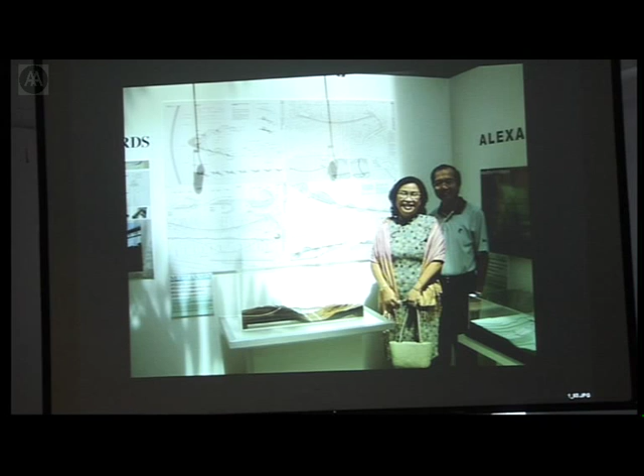So it's a big planning project for Singapore. In other words, it's not really about just doing buildings and infrastructure. It's about planning this very long area. So there is basically one site, which is ours, which is here. Another one, which is Alexandra Link, another bridge. Competition was set at the same time, plus a number of other small projects that make up that very, very big kind of region.

So this is a close-up of these models, which are very nice. The Ministry of Equipment has them in Singapore. They're all over the place at different scales. This is our site. That's our bridge, kind of. And to put the scale into perspective there, the bridge is actually 250 meters long. So these are fairly vast areas that we're looking at on the model.

And I think the criteria initially given was the distance between the two peaks, which we were trying to connect, the 250 meters, and the allowance of support piers at around a 25 meter to 50 meter spacing. Other than that, there was very little control or constraints over where this bridge could be formed, other than the model that you see there.

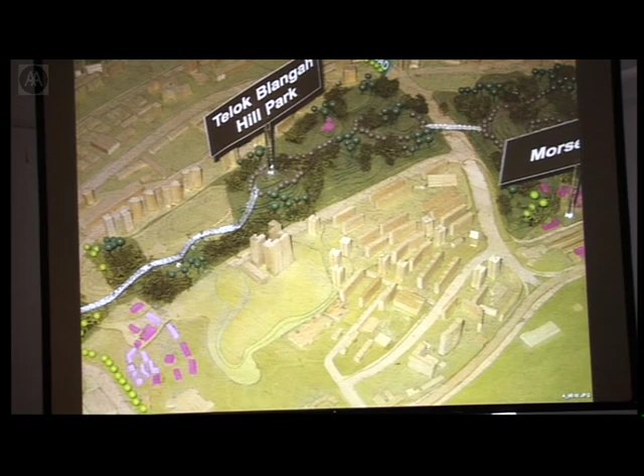Yeah, it's exactly that, if you like. The competitors were offered two sites. In other words, you were invited either to do this one or basically that one. And as Paul said, you see the one we chose, Henderson Crossing, is actually a sort of great leap forward, almost 300 meters between point A and B, over a freeway with 6 lanes, as opposed to this one, which I believe a number of people did even at the AA.

It's a very nice site, which is effectively a long crawl towards that avenue here, which is called Alexandra Link, followed by a very small leap, a tiny bridge, if you like, over the freeway itself. So this was more of a landscape project than an infrastructural one, or kind of a nice integration of both. I mean, if the office had been bigger, we would have done both, but it was difficult.

I think someone from the office, your office, did the other one. Was it Raymond, I believe? They didn't win. Okay, no. So you can see the Alexandra Link here and the Henderson Crossing.

That's part of the brochure that we're given. This is the jury, by the way. This is Mrs. Coe, the Director of Planning.

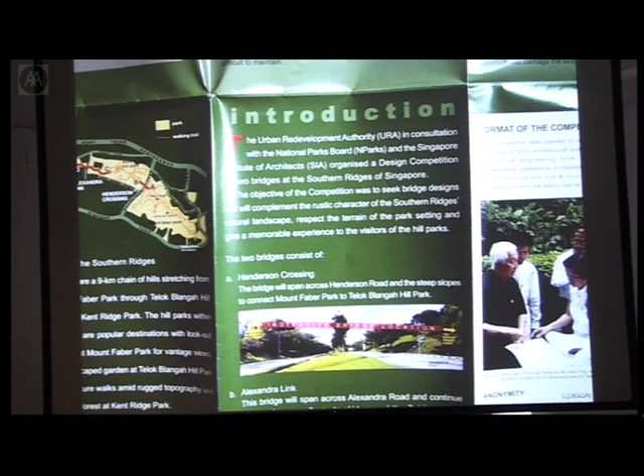And you see that's what the site looks like. I think Paul and I took that picture that morning we arrived. It's a strange mix of secondary rainforest and public housing. So depending on where you actually look, you are either in the jungle or in the middle of a concrete town, and it's a quite nice mix, which, for those of you who are familiar with Singapore, is quite common.

Now, this is the site, and as you can see, that picture wouldn't have been possible without the bridge proper, which you see a little bit in the foreground. That's the freeway. It's a really beautiful, very, very dynamic kind of thoroughfare, sort of crossing through that chain of hills. This is where the picture was taken earlier, where Paul and I were sitting. So that picture is taken from the bridge as well.

I promised I wouldn't talk about process, but it's a little bit about that as well. The project began initially as an algorithm, a piece of text, an early text that I wrote in IJP, which came out in 2003. That was the first phase of the project.

There is one text here where the actual equation we used is described purely verbally. Somewhere between the conceptual definition and what happens much later, this is a slide of the contractor, and somebody working with the contractor who's actually produced stencils of indices to mark every single metal load-bearing element that's part of the surface form. You'd think I would have asked for that, but they actually did it themselves.

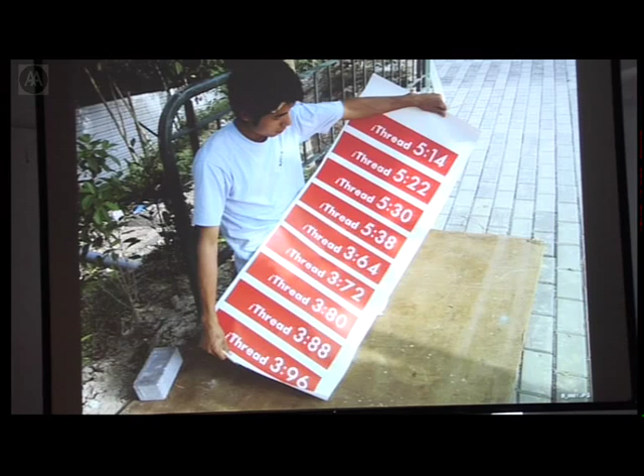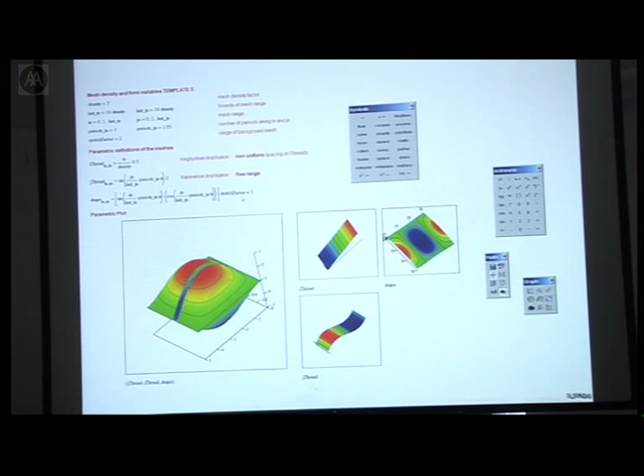That's the text in question, in which I discussed the pillow as a kind of mathematical construct. This is the seed, the egg, if you like, from which the bridge hatched. You can't quite see it right now because this is the undeformed, undifferentiated structure, but it's really the type of equation which, further manipulated, has that elementary figure we were looking for, an alternation of peaks and troughs, which Paul very early defined as a succession of arches and catenaries. I'm saying this because that kind of information is what we shared at the very beginning.

I think it's worth saying that when we had the basic parameters of the site, we sat down and started to look at what form the bridge could take without getting into the mathematics. We began to look at what an arch should do if it was going to work efficiently, what kind of span, what kind of rise it should have, and what we could work with in terms of the terrain as well, and where the support should be.

So we tried to set some basic parameters very early on in the design process, which could then be fed into this mathematics here. And it would begin to inform the design from the constraints that we were working from the site as well.

We also had an idea of the kind of materials we were looking at, how those materials were going to be formed, how the curvatures could be formed, and all of this information is incredibly important to bring up front and early on in the design process, knowledge about the manufacturing and the erection of the bridge itself. All of that helps to drive out a very real solution at these early stages.

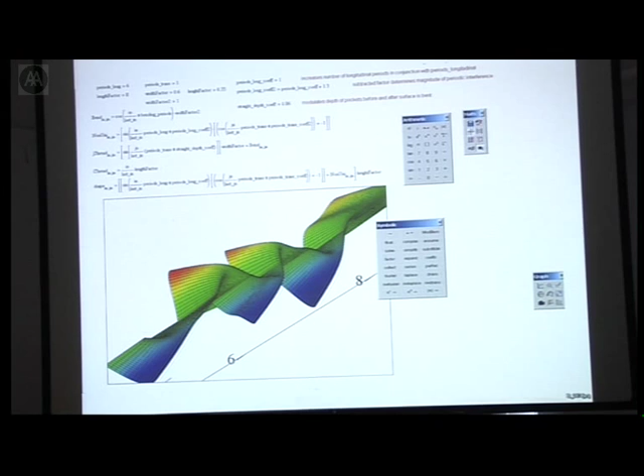Basically something that could be very easily produced. I usually use this slide to say that using this particular method, which is IJP's trademark, you can do anything you want, including something that looks as cool as something you could do in Rhino or Maya by more traditional means, but which in this case wouldn't make the structural cut.

So this is what Paul and I, in the end, settled for. It's this succession of upside and downside pods, or spans as we call them, which Paul defined quite clearly as being able to work with longitudinal members, which would be alternatingly arches and then catenaries, on the flip side. I think the important thing at this stage was, as we were developing it, we could begin to import it into analysis software and test it from a very basic point of view.

But at least, again, we could begin to inform the design not only with the parameters we originally set up, but now we could start to feed in the analysis we were doing on the bridge, and we could then tweak any of these conditions that we originally set.

Because George was working very much in a digital environment and had complete control over all the coordinates he was using, it made this transition or discussion between the structure and the architecture very easy. Things crossed the platforms very simply in terms of drawing, analysis, and between all the different pieces of software we're using. That's very important at the early stages, to get real feedback in real time.

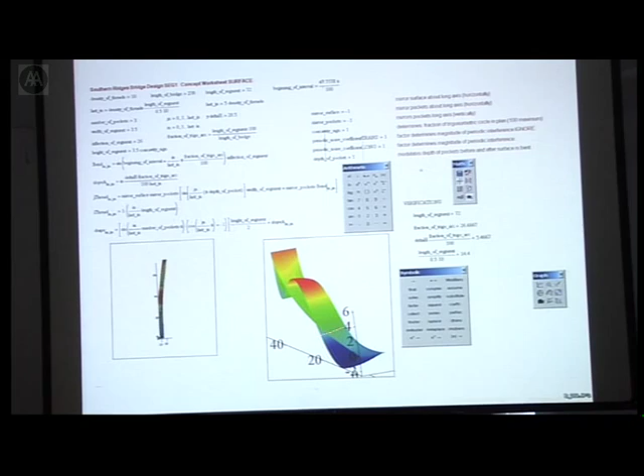In the spirit of showing what the process really does in reality, that's what the succession of arches and catenaries became. Mathematics has really informed the whole process in a give and take way, as Paul just explained. This is the seating, that's the math of the seating if you like, which doesn't quite look like it, but in reality it's basically these areas and so forth. It's the same kind of relationship between the algorithm and the making.

Another thing I wanted to say is that over the years I've been releasing detailed pictures of the bridge, and Paul and I have been saying everywhere that it's 300 meters long, but it's probably been misperceived as being smaller than it is.

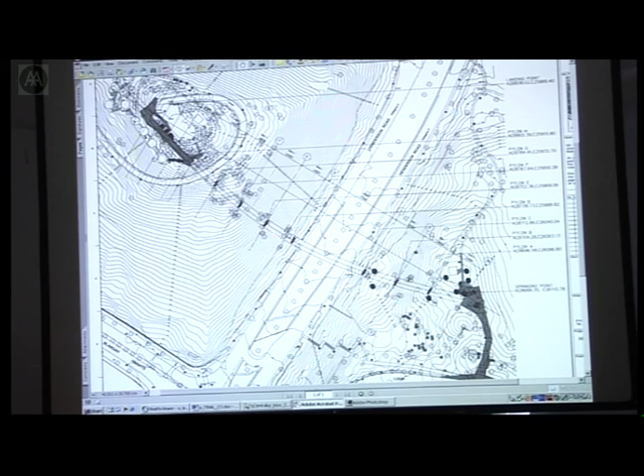I just wanted to show you, this is the springing point. These are the pillars that Paul mentioned, which are spaced by either 24 or 60 meters. And it's a big structure. If you look at how it spans the landscape, in reality you can't even photograph it entirely. This would be one shot of one of the 24-meter spans. So either through the distortion of the lens or the landscape, it's not a structure you can capture in one stroke.

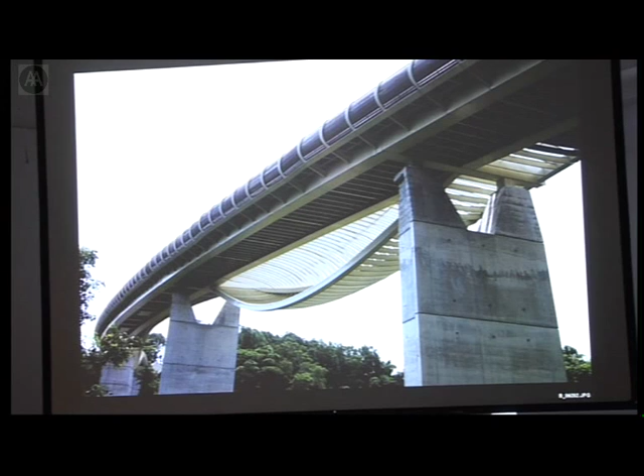Yeah, very much so. If we're working with complex or irregular forms coming from other pieces of software, some of the big problems we have are trying to clean those models up. Geometrically, they can often carry a lot of problems within them. When we bring them into a different analysis software, it will actually fall apart because it can't understand the same geometry as where it's come from. So this kind of cleanliness, this way of working, was again very important to get into answers quickly and get real feedback into the design.

And from this we could extract, as George says, center lines to all the members we had. We could begin to check geometry, start to think about fabrication, and think about how the bridge could be spliced, brought to site, and erected in place. So all of these thought patterns can begin when you've got an intelligent grip on the geometry you're dealing with.

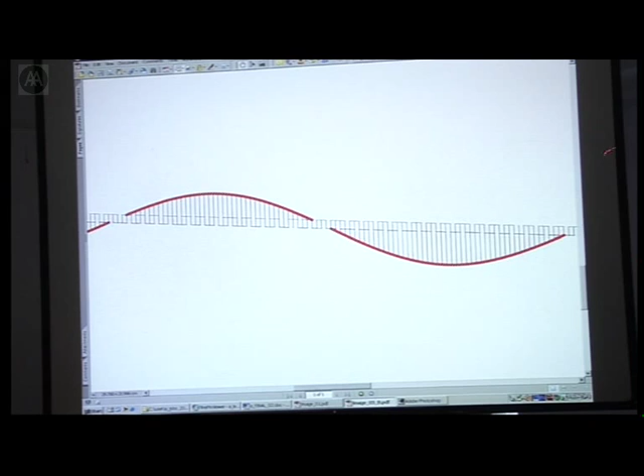So in order to leap over that gap of 300 meters, the bridge has to bend in plan so that it's a little bit longer. It also has to climb, and it climbs by about 18 meters, which would be almost a 6-7 story block. And then, because it's periodic, it has to undulate. The combination of those three movements produces an elevation like this one.

I show this slide quite often to draw attention to the fact that it looks like, say, a bird's eye view, but it's actually a facade, because the three motions built into that parametric modulation make the form slide in and out of alignment. For instance, each one of those members here, all those lines are shown in true shape, like you could measure them with a ruler, while at the same time they move wildly in depth. That kind of effect is quite familiar.

What it means on site, familiar to those who use parametric equations, is that you can easily mistake a plan for a section and vice versa. In reality, you see all these points vary. That detail was developed to pick up those slight differentials that have to do with that sliding in and out of space. But all these members are absolutely parallel and can be flat sheet cut and assembled. That was an early benefit of that particular kind of modulation on the definition of the structure.

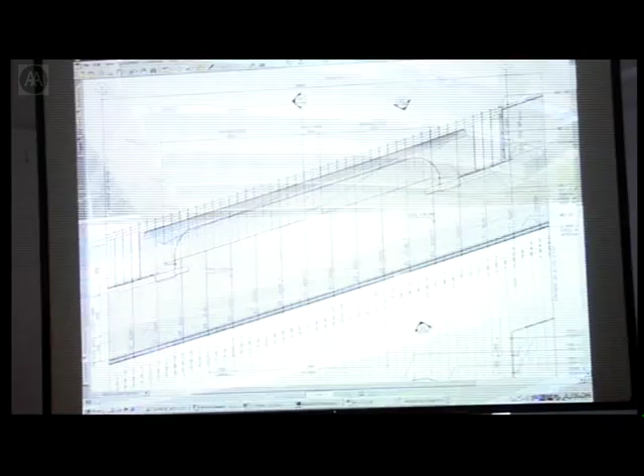Another problem of this sort is what I call the Stephen Hall effect, because that facade that looks like a bird's eye view is pretty much what they used to call a cabinet cavalier projection, where you draw the elevation and draw the volume receding in depth, except here it's spatial as opposed to being just graphical. That effect has all sorts of problems.

For instance, I show this plan taken out of the tender package, on which maybe 80% of the lines shown here cannot be measured because of these distortions. So we even added a disclaimer on the tender package, somehow making sure that you wouldn't attempt to derive any dimensions of this particular element. In reality, what does this mean?

Well, this is a close-up of the diagram that we just looked at. In reality, it's more like this. In other words, it's a kind of completely discontinuous element.

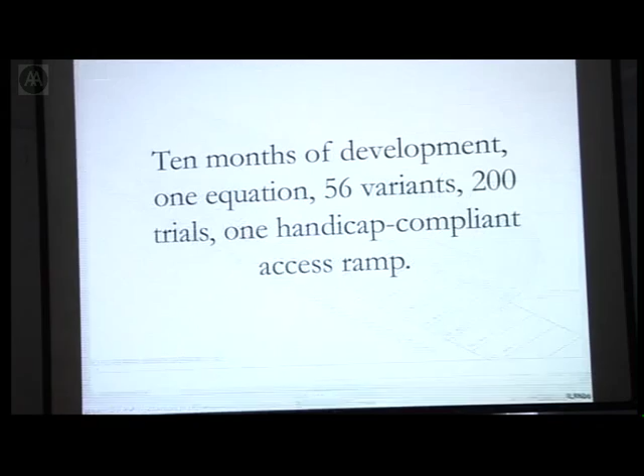So this is a close-up of the deck where you have seating, a backrest, and a series of flights and horizontal thresholds, all of which create a very discontinuous condition where, for instance, a landing, a tiny landing of 4 meters by 1.5 meters, needs its own equation in the scheme of things in order to be jogging properly with the remainder of the form.

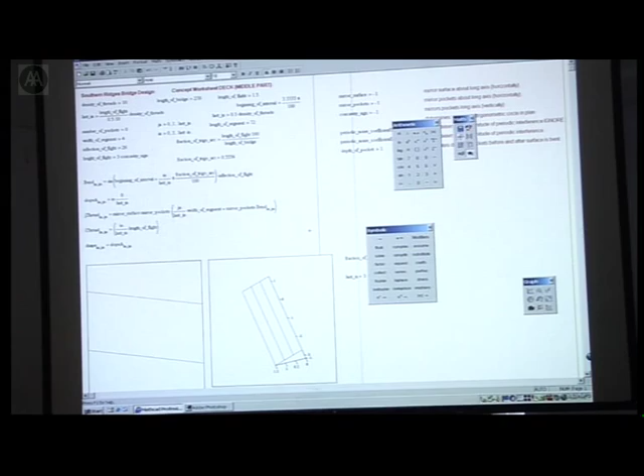In reality, it will produce these elements. And you see all these discontinuities, which give this rather unsettling aspect to the deck, which we'll see in a second, somehow begin in this breakdown, which forces you to reconsider what happens every 9 meters, 1.5 meters in space, with all the kind of periodic modulation.

So this is our control panel, which we used, if you like, to verify the accuracy of the calculations, to make sure that you don't split the deck open and that you can actually clear all the heights in order to land safely a wheelchair across the bridge over 300 meters.

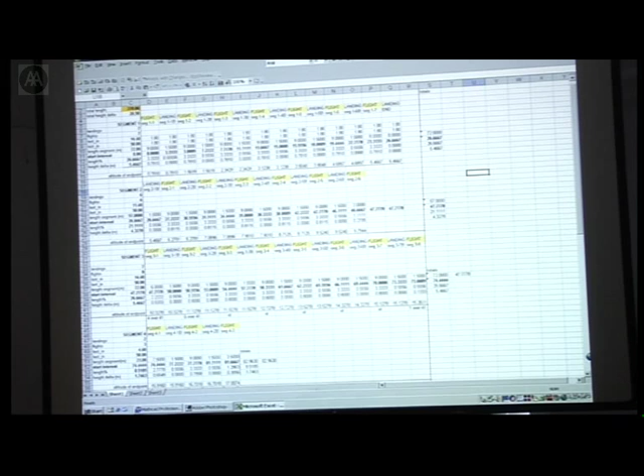For those of you who remember, we exhibited these calculations a little bit like decoration. Was that in 2006 as part of that student faculty show, in which we basically showed the maths. You see this is the 1.5 bay shown over there, next to Omar Al-Mariz, one of the Dip 5 students, on mathematics.

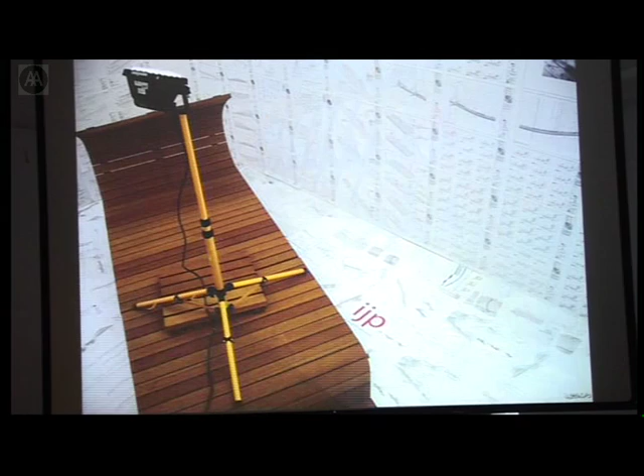So the idea was to compare a little bit the process of the teacher and that of the student. And we exhibited as well the tender package, on which basically the project was developed that year.

So just wanted to show a few things about the site. Obviously, one had to shave the mountain. That happened over periods of months. You weren't there, Paul, but there were meetings with national parks where every tree was discussed.

Sure, yeah. It was a kind of a buy and sell situation where, if you cut a tree, you have to replant one, or you can imagine—I mean this grows quite fast—but still, Singapore is very proud of its natural heritage, and there was quite a few discussions.

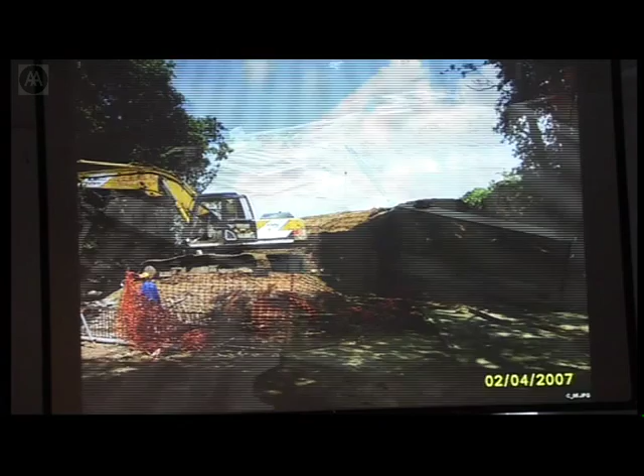This picture is taken from the springing point. So you see, that's where it begins and where it ends. The pylons kind of gradually appearing. And the end works.

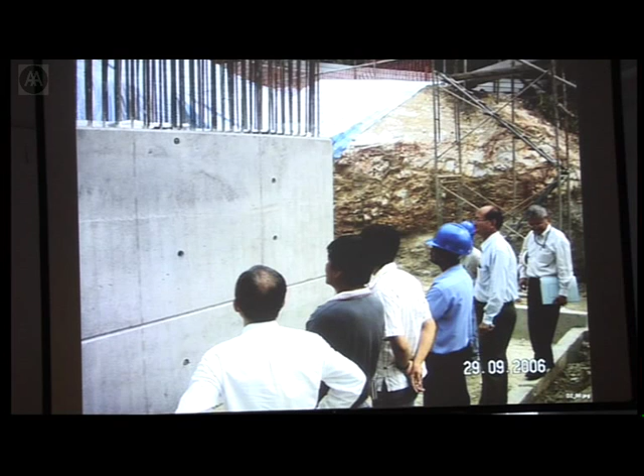So one of the things that gave us the worst time, both AKT and ourselves, was the pylons. The reason is very simple: they were not part of the equation from our end, so we had to design them, and that opened up all sorts of basically a can of worms, really.

We spent a long time on this, which basically—I'm sure, Paul, you remember—it was that scheme.

Unlike normal building structures, bridge structures are extremely sensitive to dynamics. Like building structures, we have to deal with static loads, live loads, dead loads, but then we have to respect the dynamic performance of the bridge, and that usually is very sensitive to the materials we're using in the span, and also the support structures we're using for the bridges as well.

And given that these pylons were extremely long in the centre, they undoubtedly contributed to the lateral stiffness of the bridge in how it would perform when people traversed across it. So there was a lot of discussion about the pylons and how they contributed to that.

The initial competition scheme—I don't know whether you have the initial one there—was a more solid pylon, very different to the bridge structure itself. There were comments that it needed to be perhaps opened up a little bit more, like the bridge. So we began to look at this kind of form, more of a tree form.

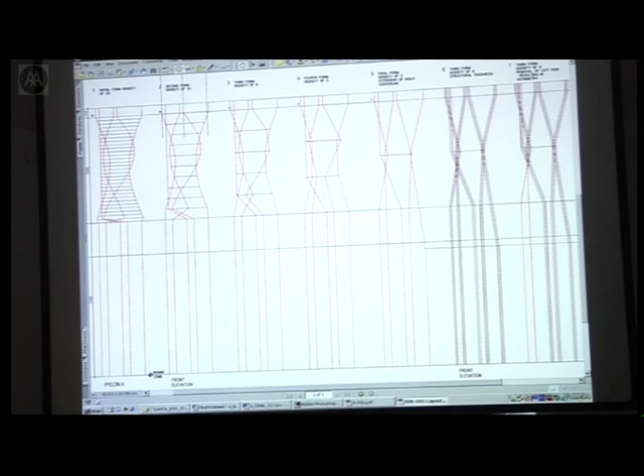What we're finding is that whilst we could meet the static analysis, when we got into the dynamics of the bridge, it became very sensitive to this kind of structure. If we wanted to open up the pylon, we'd have to close up the bridge a lot more. So it's very much a play-off between the two systems. In the end, through discussion, we decided it would be better to add more stiffness into the pylons and maintain the integrity in the bridge.

I think the next slide shows that we also looked at possibly changing it to steel to get some more stiffness into the upper part there. So part steel, part concrete, looking at the different construction techniques of doing this. But still, we needed more of this kind of form in order to get the horizontal resistance that we needed for the bridge to respond to.

There's actually quite a lot of work done on this, many hours spent drawing the form from different angles and working out how it could work with the bridge. So you see, as soon as the tree-like option was abandoned, we moved towards the open legs option, which was rejected by the local partners.

So we started bringing them close together, and then looked at various ways of imprinting a relief. You can see that from that very dendritic, expressive design, we've been moving closer and closer towards that singular pylon. Then at some point we got hold of a design that Renzo Piano did for a bridge in Tokyo Bay, which was very simple and similar, except that the proportion was actually far less desirable than this one, which became basically our final option.

So the pylons come in different heights. This one is about a bit taller than I am, a stump really, which you can see is gradually cast in situ around the springing point, before the structure is overlaid on top, and we'll talk about that in a second. The middle ones are quite tall already, they're 20 meters high on the other side, and there's 20-25 meters already on the springing end in Mount Faber. And then the tallest one is nearly 40 meters.

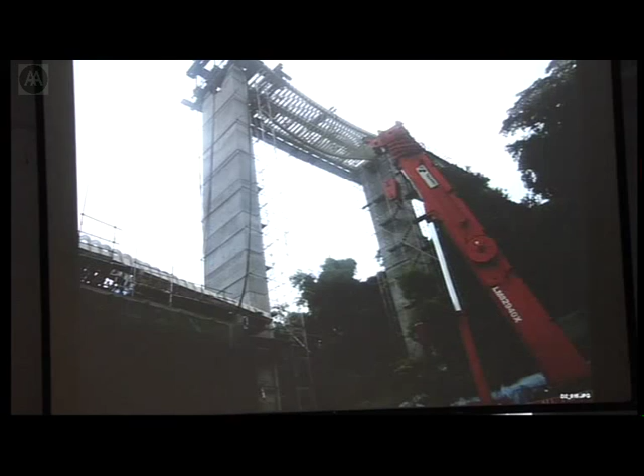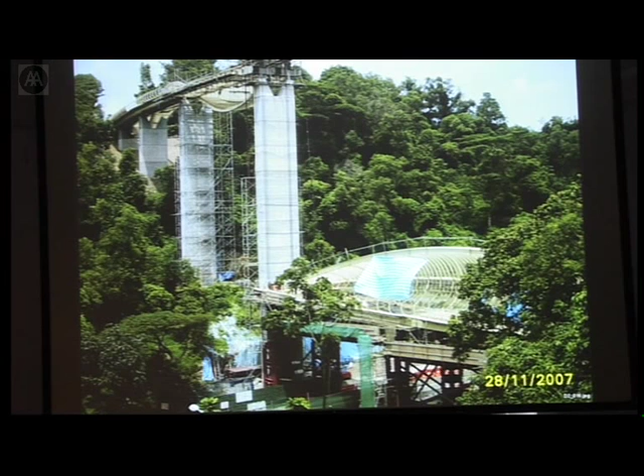It's very high. You can see the one that's the highest one is the one on the left, which in the end I think works quite nicely. This is the situation in November 2007. I'll talk about the bit on the floor over there, which came last.

And yes, in conclusion, you see because the inflection point where the surface self-intersects is where we collect somehow the lateral forces exerted by both the catenary and the arch, somehow that very simple column sitting on top of there, collecting those things and going straight to the floor was, I thought, a rather desirable kind of solution.

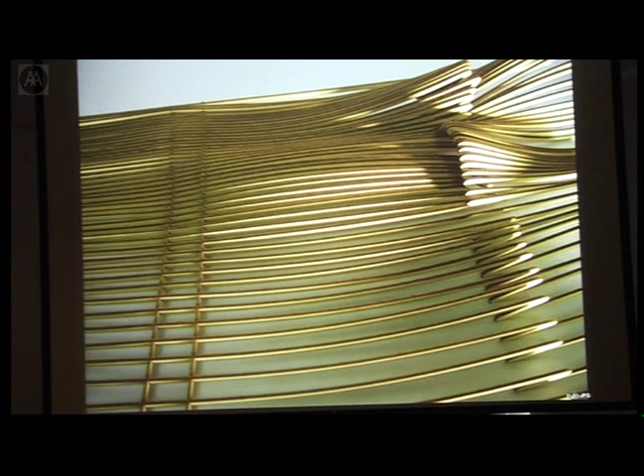The project really exemplifies almost 7 years of research on what it means to simply parse equations and look for a one-to-one relationship between the numerical series given by the math and the center lines of material members, such as this laser cut model by Åsa Nilsson, a Dip 5 graduate in 2004.

This is basically, Paul was going to explain the basic structural diagram. Yeah, this is a typical span within the bridge. Just to explain the structural components, the main bridge deck itself has a central spine member that does most of the work in supporting the main deck. That follows the bridge in plan and curves to follow the bridge as well. That's in a single curvature, basically.

That's kind of mirrored also on the edge of the deck here by an edge member that simply follows the same geometry as the central spine member. And then above the central spine member, we have this arch structure that rises and drops below, either creating an arch or a catenary.

Now, the main problem with the arch was that it could support the form, but it was also susceptible to lateral buckling. All arches will try to buckle sideways when they're in compression unless they've got some kind of constraint. These ribs here are the members that create the restraint to the arch and prevent it from buckling.

There was certainly no way we could connect the arch to the central spine member because it would cut the bridge off from pedestrian use. So we were using these rib members not only to create the architectural form of the bridge, but also to restrain the arch itself.

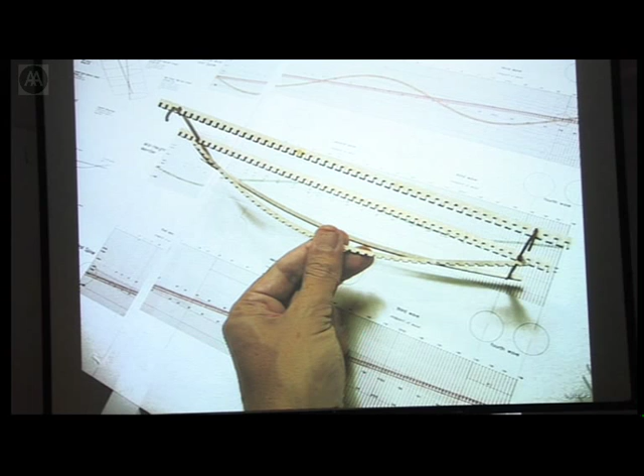The curved rib members that Paul just mentioned, so it's a laser cut trial, if you like, which in reality turns into this.

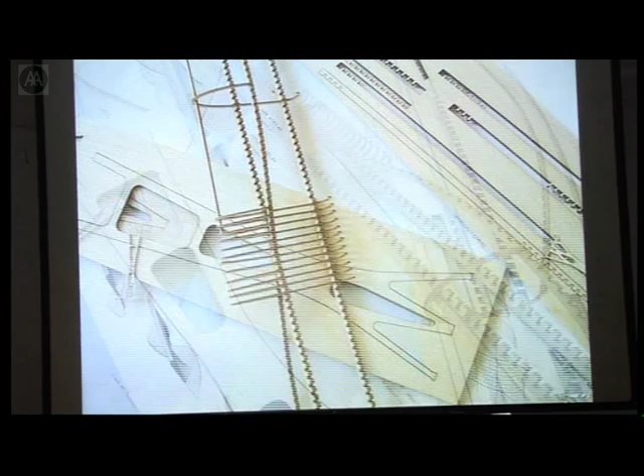These were laser cut, and I did get the feeling that we could probably even manufacture them that way. So when it came to making models of the long members and the short members here, I was quite happy visiting the steel plant in Malaysia last year where this is being cut.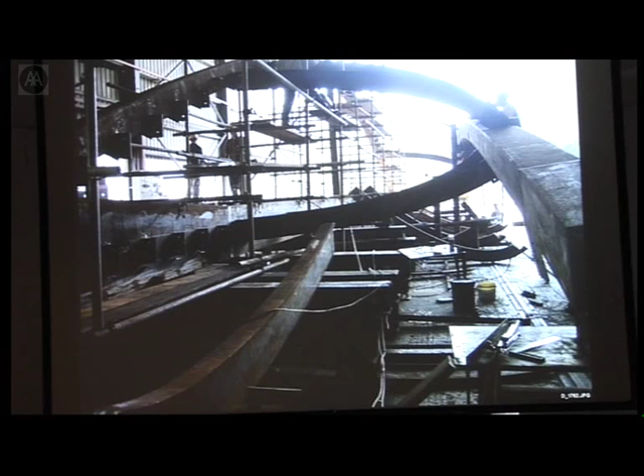So this is the edge member - sorry, the mid-height member, Paul, right? Mm-hmm. And then the arch. That's right, the main arch at the top there.

These, we'll come on to this in a minute, but basically these were done in single curvature, while the model that George was actually working up in the geometry he had was in double curvature. So there's a certain degree of rationalization, and there comes a point in a project with these kinds of forms where you have to look more closely at how things will be fabricated and how you can bring the two together.

Once the members were welded, they were painted on site. The painting bay of that plant is as big as a small airport, and they were left out to dry. This is an edge member with that extra piece that holds the balustrade, which we'll come to in a second.

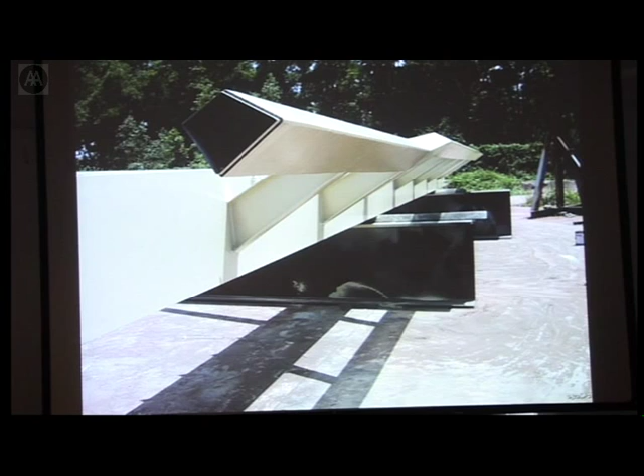This was our own study model that we did about 2 years ago, which obviously in reality translates into something with different dimensions and a different function.

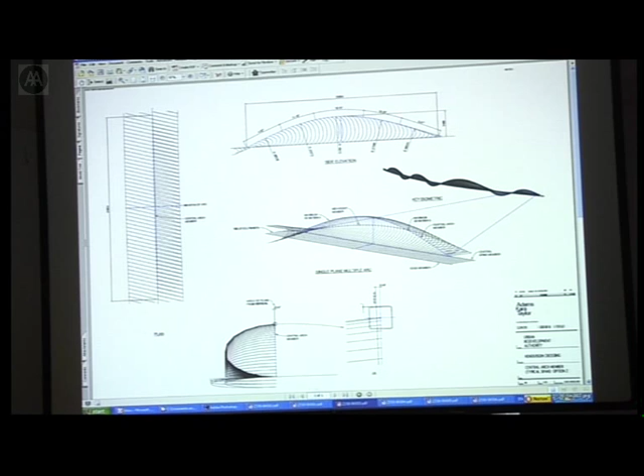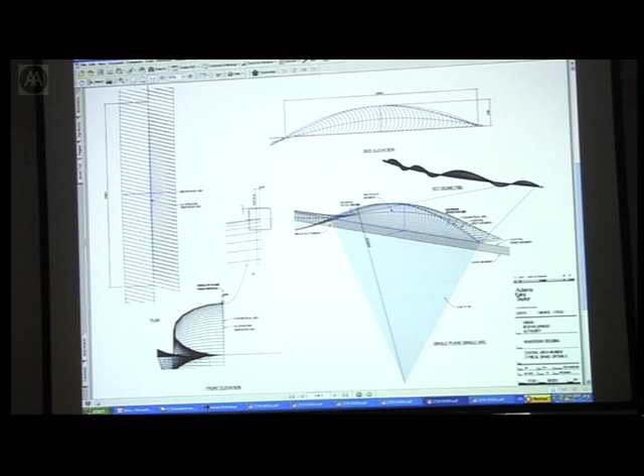The next slide took that a stage further: if we try to do it as a single curve, a pure curve without any change in radii, what would happen? The deviation in angle was again very small, only 0.5 degree on the typical spans, but we started to move about 280 millimeters away from the original theoretical line, and the next slide shows us moving away even further.

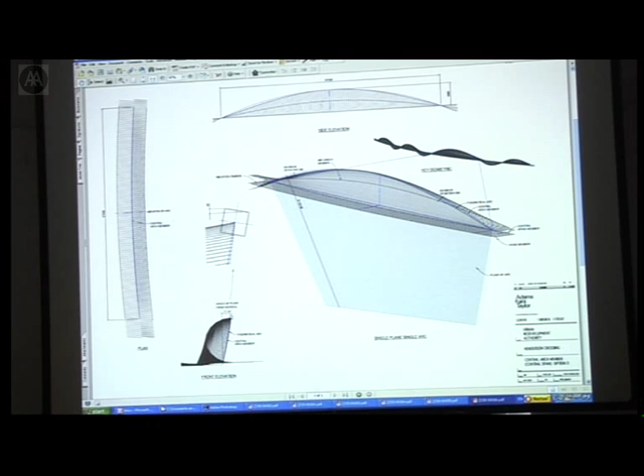At the time we were developing the design, we concluded we should break it into 5 radii for the fabricator to work on. We then started discussions, and I think in the end it was probably broken into 3. There needs to be recognition, in developing forms and structures like this, that when we work with double curvatures we need to know what we can do to simplify it and help the fabrication process. It's not to say we shouldn't do double curvature, but we should at least know the implications of trying to rationalize these kinds of forms.

On site, these considerations are quite different. This is the end works, which was the first element to be built - brought in straight from Malaysia, painted, welded, and then assembled on site, starting with the landing area, which you can see here in the foreground from both ends.

This picture I took a year ago, so you can see it's progressed quite quickly. We did not excavate that last part of the site - you can see how close the ground is to the steel structure. This is what allowed us to reach those 300 meters without great expense. In other words, the end of the bridge is really a sort of platform that simply looks and feels like the rest of the deck.

Steel-wise towards the springing point, you see the workers have basically covered this entire area. You can see the spine sitting already under that network. You can also see the dampeners picking up some of the potential vibrations, although it's not as critical on the end works as it is on the central span.

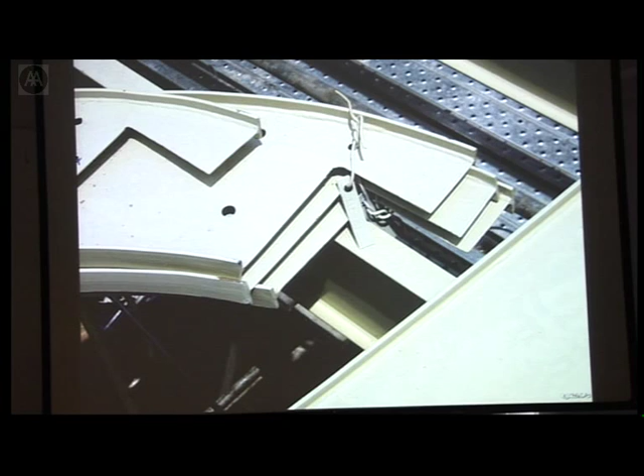Moving slowly towards installing the edge members with the support for the balconies, then the first curved metal ribs with a bit of the arch. These were laser cut, painted, dropped on site, and gradually assembled one by one, with workers having to make sure everything is completely level and parallel, literally the way students build models piece by piece, except each one weighs 120 kilos, and unlike what this slide is showing, sometimes you're hovering 20 to 40 meters above earth level.

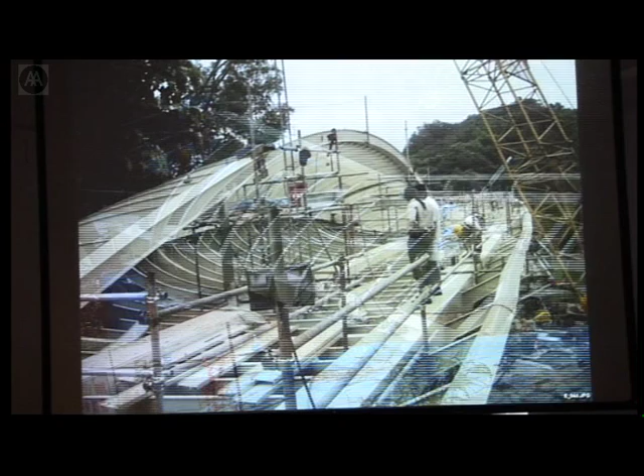So it was quite an involved building site. You can see the first of the upside waves being assembled. It's even done in 3 parts, broken up because there was no crane that could be hoisted up there, so they had to simply do it in 3 pieces. And that's a completed element — you see it's been welded 3 times in these areas.

This is the first complete upside wave about a year ago, in which you can see all the members we discussed. It's a really nice moment because it's got this skeletal feel, which will soon be lost when the timber covers it. Also the color, which had been a huge argument amongst ourselves and our local associates, turned out to be quite nice in the end — this sort of buff color with a bone-like quality that evokes the skeletal, almost prehistoric, slightly animal-like quality of the form.

Continuing towards the standing point, reaching the first pylon away from the platform, you can see an edge member that spans over this little piece of path. So the bridge goes over a path — there's a kind of loop configuration that you see on the master plan.

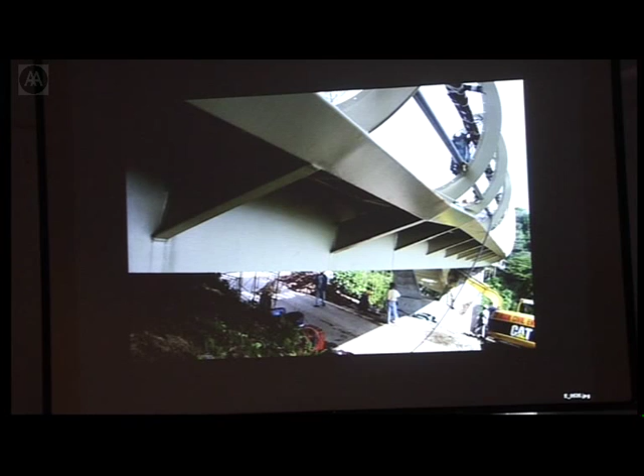And reaching the first downside wave, which is still being arranged here over the first pylon, so you can see everything looks quite messy prior to the alignment. When I visited, I went there with my ruler, worked on this beam, sat down, took a couple of measurements. The contractors were completely silent, wondering whether something might have been done wrong, which obviously wouldn't be the case.

But it took a lot of time to actually get a sort of smoothness behind this array. So that's another view of the downside wave, again being assembled on site. You can see the difference between the boxed and the I-beam sections.

On the drawings, I thought this was anathema — I was completely against using I-beams. I tried to impose flanges as narrow as possible. This was also good for budgetary reasons, but as you can see in the end, it was a bad decision, because the only thing you really see is those surfaces that are normal to the light and therefore look brighter. If the flange had been as wide as the box, it would have had a perfectly homogeneous view, much closer to the model.

Except that unlike the model, it is much cheaper because the I-beams are just welded together, whereas the box sections are made of 4 separate pieces. So these small nuances, the difference between a box section and an I-beam, can make or break a project for budgetary reasons. There were many months of discussions in 2005 over whether this or that solution would enable us to clear the budget, save the project, and so on.

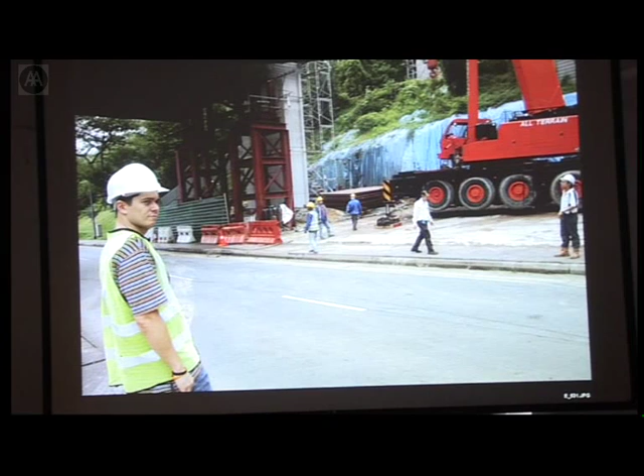From there on, obviously, the structure continued. There was no problem — it went basically all the way to being completed. What has always been an issue is the middle span.

You can see here we're right above the freeway, and the middle span, which is 60 meters long, was treated completely separately. It was prefabricated in Malaysia, but the components were not actually assembled in the plant and then ferried over to Singapore — it was actually done right here on that makeshift platform, in position.

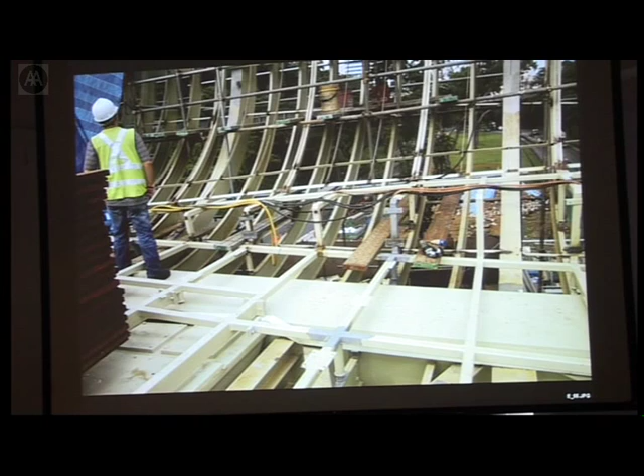You can see that it's placed in such a way that it slopes already at the right angle, because it was simply too heavy—you couldn't somehow wheel it or ferry it all the way on site. So it was built almost on site, right below, next to the taller pylons, for months on this kind of makeshift platform. It was even clad with timber. Then, in the space of a night, all that formwork, which you can see here, prior to the cladding, was jacked up along this pylon. So you can see this is the naked expression of the structure.

This is a span that Paul just described, which was post-rationalized by AKT into 5 points. You can see it looks very flattish because it's stretched mathematically to double the height of the other waves, which it has to be so that this arch can span 60 meters. The steel guys did an amazing job converting all these lines of intersection between doubly curved areas and flat areas, building those lines to make the timber work absolutely possible and precise.

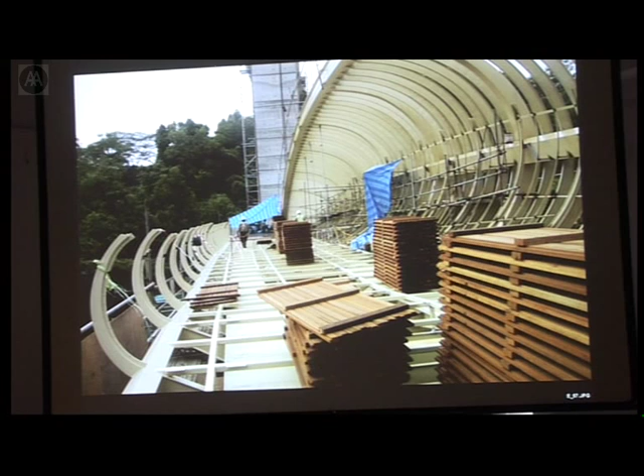I must say I'm really impressed with the steel. I think those guys did an unbelievable job, which in some ways enabled the timber guys to work very precisely.

Another thing you notice is the scale of this. Look at this guy—this is 6 meters. You could have a small 2-story building sort of hovering in there. It's absolutely big, and you can see the hoisting of the structure took place through those 2 pistons. So it was not even craned—it's too heavy to be craned. It was just hoisted up, again in the space of a night, during which the freeway had to be closed.

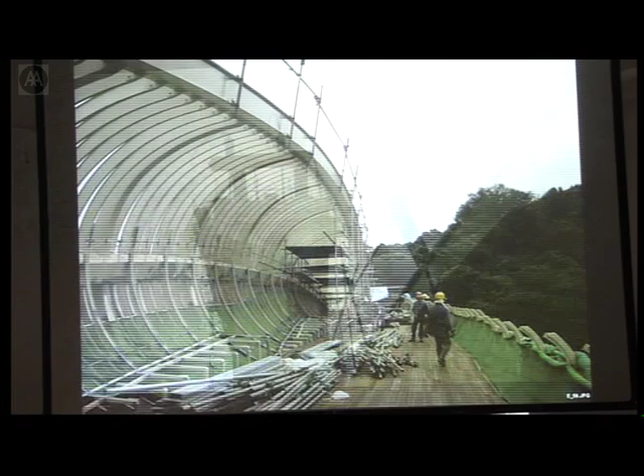This is it on site. You can see that now it's been mounted and partly covered. These are the areas I was just discussing, and you see the scale of this particular element.

Anything else you wanted to say about the structure, Paul? Well, I think at this point, for a structural engineer, this is probably one of the most interesting points in any project, where you get to see the skeletal form before any of the finishes or cladding or whatever the skins may be. But this is also a very crucial point, because it's not until you start applying the finishes that you actually know the geometry's worked and you've got control over it.

There is a certain amount of tolerance given in fabricating curved sections. Things will never follow exactly as they should, and I think the bending tolerance on the arches was about plus or minus 30 millimeters. It might not sound like a lot on a large span, but these kinds of errors can build up quite dramatically when you start to attach a timber form to it. So it's a very interesting point in the project, but one that no one quite relaxes about until they start seeing the finishes applied.

The local firm that took over the engineering at tender time made a few small changes, such as the tapering of the load-bearing curved ribs, which would never have been allowed if done at a schematic design level. But even so, I think in the end it doesn't work too badly.

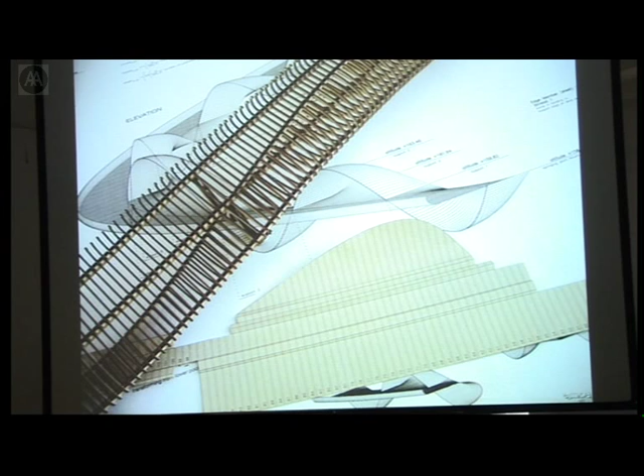The only real design bit of this project is the deck. In other words, everything else is pure structure, which is also a question of design, but not in the ordinary sense applied to that word. So the timber deck has been something we thought very hard about from competition time. We always envisioned it as a kind of pliant surface, something we could bend at will, one that would interact with the primary geometry of the structure. In this early model, the idea was to come in and out of the pod through the thinnest of curved ribbed members.

This idea was abandoned since we ended up stopping the cladding along the spine proper. But the rest basically remained unchanged.

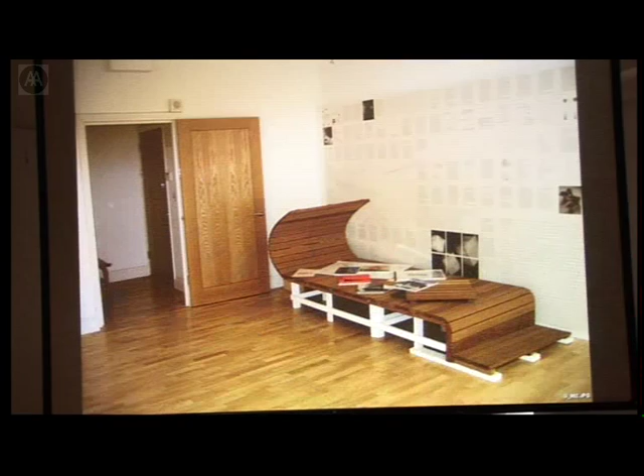This is an early model done by the timber contractor, showing the material of choice, the hardwood, yellow balau. One of the misleading things about this model, which he designed and sent us for the 2006 show, is that it looks like garden furniture. It's just really flat and kind of boring. Lots of people lost interest in the project after that show.

At the moment I have it in the office, where sometimes I sleep on it. But the nice thing is that it shows you what 2% of that surface is actually doing, which is the seating. Somehow the seating area, which is indeed horizontal, as opposed to the deck which you can see right there, which is slanting, even on this tiny sliver, and the backrest which is doubly curved, is nothing like what this early mock-up shows, although it's a fantastic thing to have done early on, which really showed the commitment of the timber contractor, who's really the person behind the success of the design bit of the project.

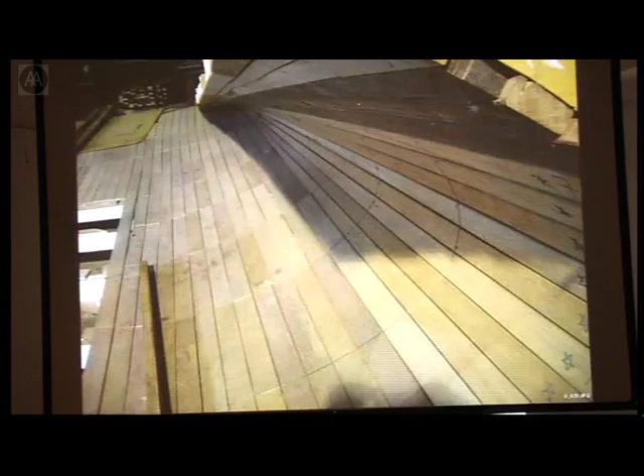So in reality, things are mostly single curvature, such as this mock-up for the timber balustrade, and very often double curvature as well for this detail of the corner of the pod. So you can see that every bit is actually tapered by hand.

This is pretty much what the equation is giving you, in the sense that those lines have to remain parallel to each other. You can see that if you moved the light, the shadow of this element would actually be completely aligned with this joint.

And if you keep that rule going, then you'd basically have to taper the elements, which they did by hand, which is quite an amazing prototype. When we did this in MathCAD and then in AutoCAD, I was told this is AutoCAD, you can't build that. And then when I visited the workshop of Ventura, it was just that. It was there. It was possible. It was done. I was obviously quite overjoyed.

In reality, what this means is that you clad, so the timber is gradually carpeting the earthworks. This is the landing, I'll show you the detail of this later. So it's a very nice sort of stepping through the discontinuities that I mentioned earlier. And this is basically what it looks like in the earthworks. There's also furniture that I haven't captured in the picture, which follows this idea a bit. So you can see the way the cladding has now simply covered these earthworks.

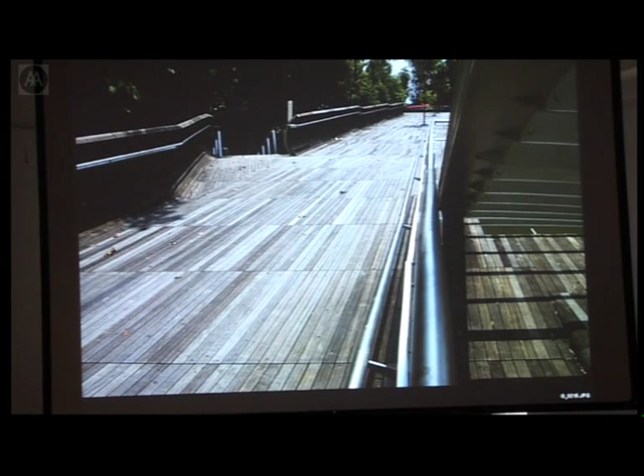But how is that really done? Well, it was pre-cut. We made all the drawings, developed that surface, pre-cut, numbered, and then installed on site with quite a few adjustments. Actually, Ventura told me that yes, it's great to have the equations, but you still need to cut the bits considerably on site, which is also what Dip 5 students experience every day when they make models. There's a lot of basically tinkering with the results of the formula.

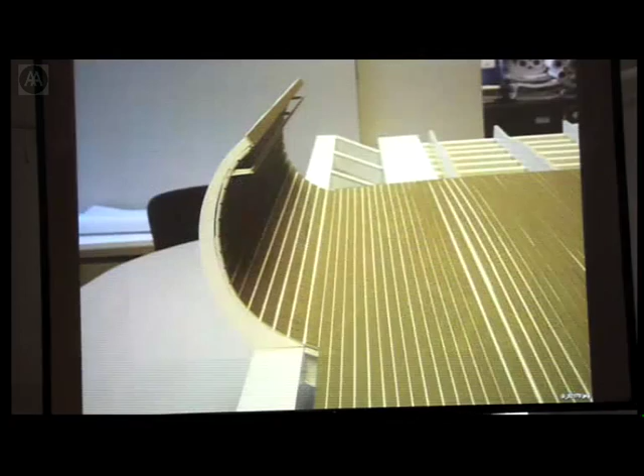So this is a detail of that element. Using the steel member, you just form the element along its length. The steel members were actually designed and drawn by AKT and then fastened to the edge member, following the discontinuity that I explained. This is basically a flight.

It's oblique, 9 meters, and then it's broken by 1.5 meters worth of landing, so that a wheelchair can actually pause. That kink we've carried over throughout the structure.

I had this really interesting discussion with Carlos Kucharek, the journalist who wrote the profile of the project in RIBA Journal last month, and he asked me about that kink, and we both agreed that this wouldn't have passed muster in, as he called it, a high-tech office 20 years ago, when that particular kink would have been perceived as a mistake.

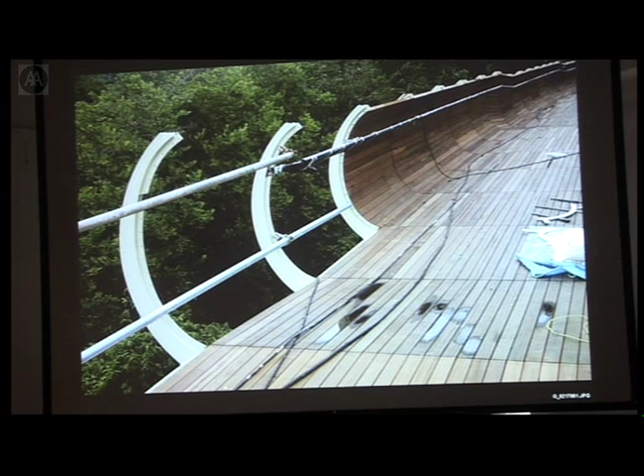But nowadays, if you just let that peculiar logic of the movement of the wheelchair carry through the entire steelwork, it actually looks quite contemporary, I think, although on the other side it looks a bit messy, but that's what you get for being literal. So this is a detail of that.

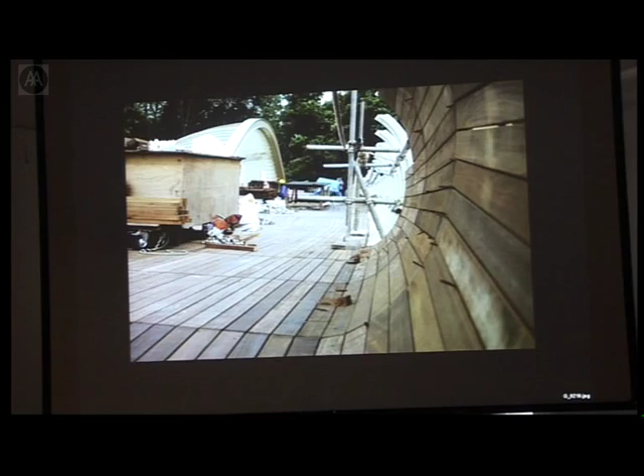The way it's done is that once you fasten those to the edge member, you panel bit by bit until you basically get this quite extraordinary tapestry, and you can see the kink that I'm so fond of, somehow colonizing the entire geometry. All these elements are sheared, as I said. Everything in plan is sheared, oblique in space, then undulating, so that kind of instability in the end produces a rather composite surface.

That's from the back.

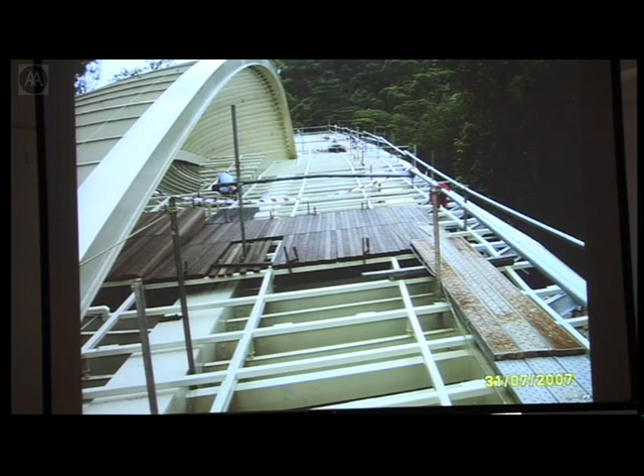This is also how you clad the arrival. This is a bit like what we have at the office, what you see over there, gradually somehow filling the space in front.

The detailing I thought was quite beautiful. They did an amazing job trimming the timber around the elements. This is something you would have done with solid modeling, and it's very nicely done materially.

What I like about those pictures, which I didn't take, is that there is someone in the contractor's team who has the same pathology, really keen on what they do, very interested in photographing details, probably proud of the handiwork, just going around photographing it without being asked. I thought this was really amazing. These are the people who really make the project, the ones that ensure its success.

It's quite beautiful because suddenly everything becomes very reflective, like a sort of mirror following everywhere, and it lasts a few seconds. Within a minute and a half, it's basically all gone. It's dry.

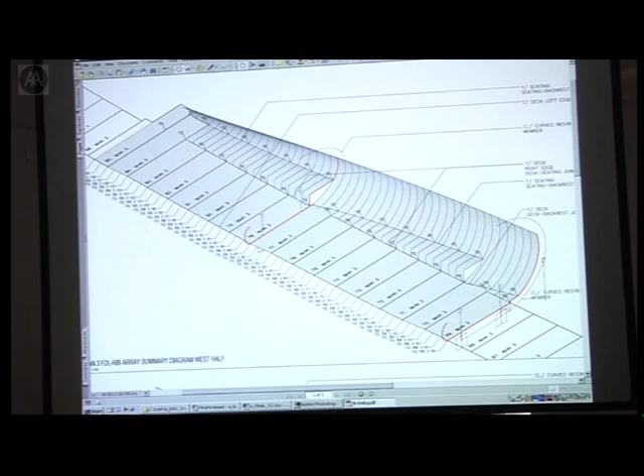The timber surface, as I said at the beginning, is much more like this—it's just a series of discontinuities. This is the tall wave, that's where you sit. This element is completely doubly curved. So that's the skeleton behind it, and this is the line where the double curvature meets the horizontal plane of the seating.

So in order to get this built, the contractor developed a method which would allow them to use these as guides to tuck the custom cut elements side by side along those guides without any apparent joint, with a reverse fixing system that guarantees this incredible smoothness on the front side.

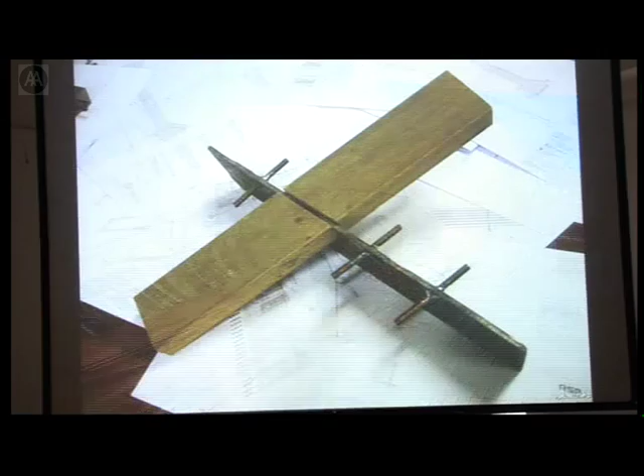They did this by creating this detail in which—this is the fin, the curved... forgot the technical term, it's kind of a back strip, steel back strip—which actually literally chops through the wood, which has these dowels, and on the back the timber is actually, you can barely see it, it's scored, so the dowel can be simply inset into the scoring and then filled with epoxy.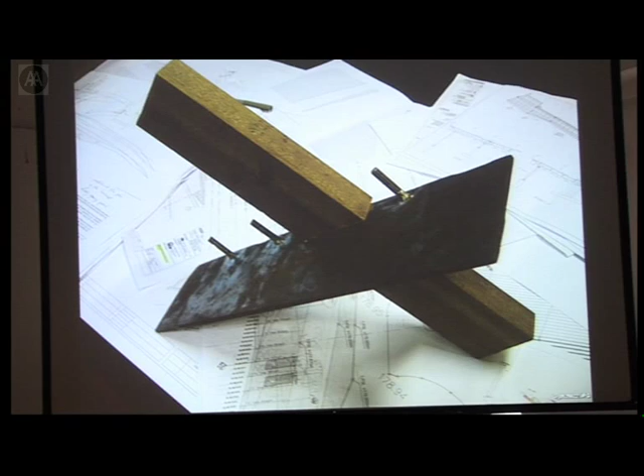So you can actually push those elements on site into the right position.

So you see this is a doubly curved area, you see the dowels are waiting. You just apply the element and then fill it with epoxy from the back and let it dry. And it's incredibly dense, obviously, because these are only 500 mil span and they're all holding each other.

It's an element in the making, and this is the final shot—I got this one yesterday. This is really what it looks like this week. It's already weathered more, you can see it. But everything is absolutely smooth and seamless. That's a view looking the other side.

So there are some horrors, last minute adjustments of the railing and things, but this is inevitable. On the whole, the project was safe from any kind of strange decision—I think everybody somehow saw things with the same mindset.

I think part of the key to the success was really the control, and we've talked a lot about geometry, models, generation of form, but that was really from a global scale right down to the detail, and that's really where the responsibility comes from in developing forms like this, taking it right through to the nth degree.

To have left this to the contractor alone to develop would, of course, have been incredibly complex, very risky, and almost certainly wouldn't have achieved this sort of desirable result. So it's a rigor that needs to translate all the way through the project, from a global to a micro scale, really.

So we're going to finish quickly with the timber of span 3, the big one, which again is always a problem—you always have to look at it independently. As soon as it was hoisted in place, the cladding began, and you had to build scaffolding inside it. As I said, this is as tall as a 2-story building, quickly creating the largest timber expanse that this project has seen.

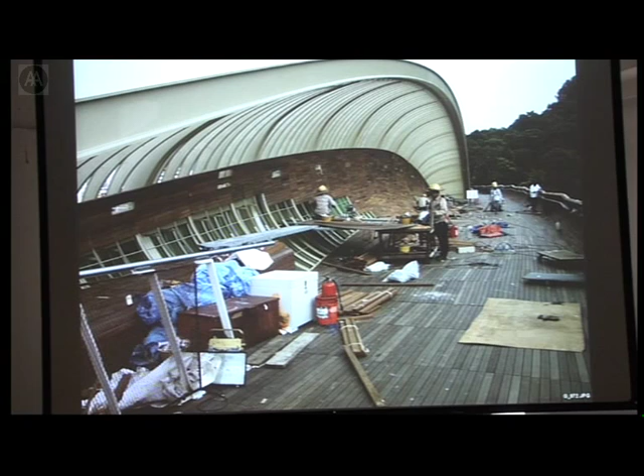Starting with the floor, which was made with prefabricated boards that were cut on site for last-minute adjustments, all the way to the doubly curved bit, which was put together in the same way, painstakingly, bit by bit, by a crew of Chinese carpenters from the center of China. They don't even speak Mandarin—the contractor was talking to them in a dialect. They're incredibly skilled craftspeople from a certain tradition that you can only really find in one region.

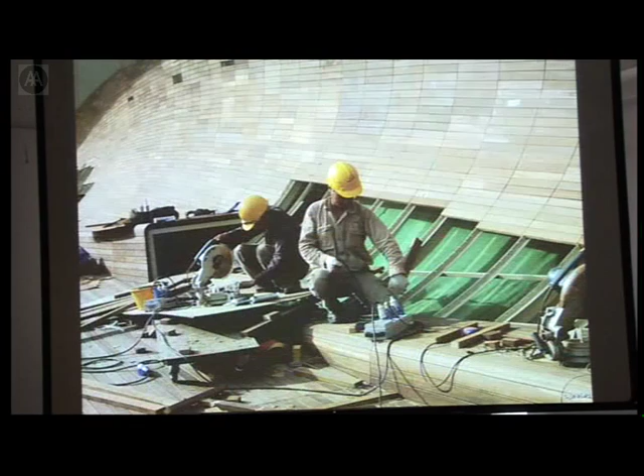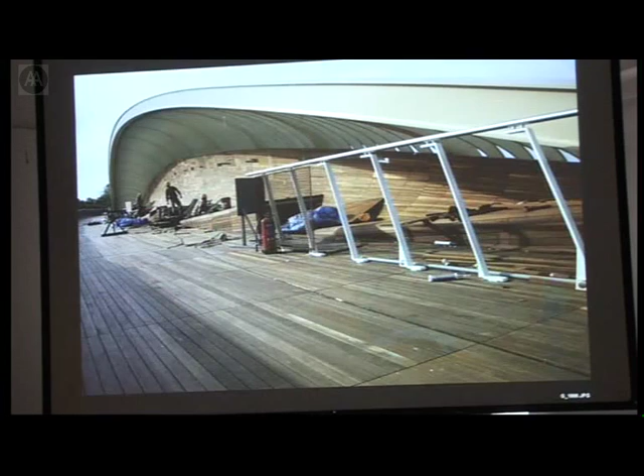So towards the end, you can see that the backrest meets the seating as smoothly as it does on all the other waves. Gradually the railing is moving in, colonizing the corners to block access to those dodgy corners from which you could climb onto the structure and possibly fall. And that's what it looks like today—I got this picture yesterday.

I'm going to talk a little bit about this. I was unhappy about the color for obvious reasons. You can see the difference between the original mesh color, which blends almost camouflage-style with the rest, and this one, which looks like a curtain that's been pulled like a veil on top of the corner. But the handiwork of the timber, I think, is quite magnificent now that it's complete.

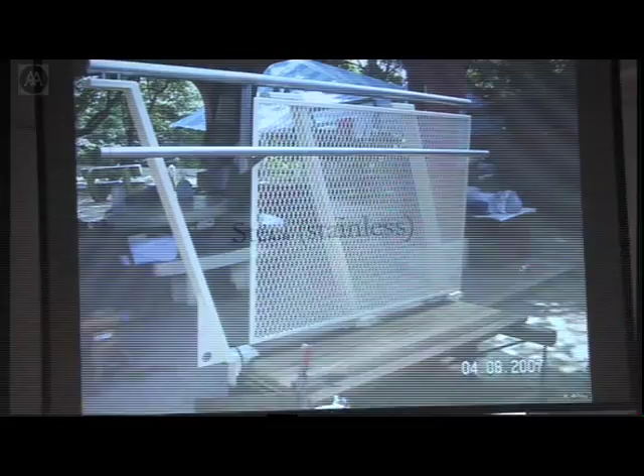Yes, I spoke about this. This was a bad idea—every project has its own share. What I really wanted was to maintain, instead of that white coating for this detail, the rusty quality of the original, which would have shown the rhythm of the steel balustrades much better, and the stainless steel handrail. But in the end, issues of cost prevailed, and that's what we have today, which you have to live with. I guess it's okay, but I find it intrusive in the scheme of things.

Finally, views of the springing point—the landing, right where it crosses that path that I described earlier. The view that I really do not like, the one that will be used to publicize the project, is the blob shot. It makes the project look quite vulgar, I think. It's inevitable—we drew it on the competition panels as well.

I much prefer the intelligence of the other side, which shows this kind of negotiation between the kinky deck and the purity of the periodic form, which here looks much more spatial in the sense that the periodicity is now combining with the double periodicity, creating this pinching. To say something about the structure in the end, you see the mid-height member that Paul added to the structure, right there—it has this beautiful feeling of a bone that actually comes in and out of the elbow, you see?

And you can see that by daytime as well as by nighttime. I think this is probably one of the most successful features of the project, which came out of that argument you made about somehow relieving the spine from the influence of those. In the end, without it, I think that view would have looked even worse. So it's actually something that's probably a learning experience as well for me.

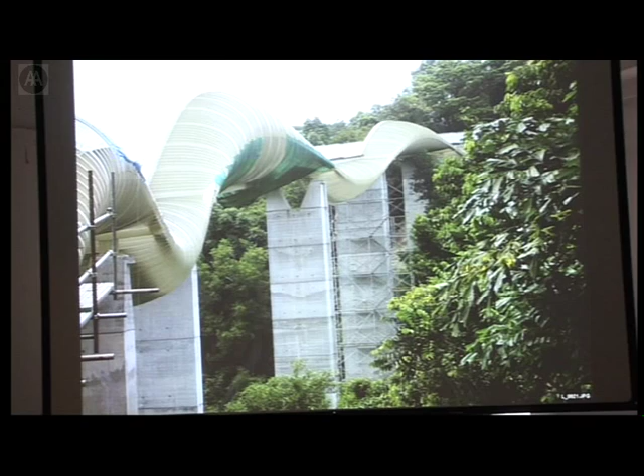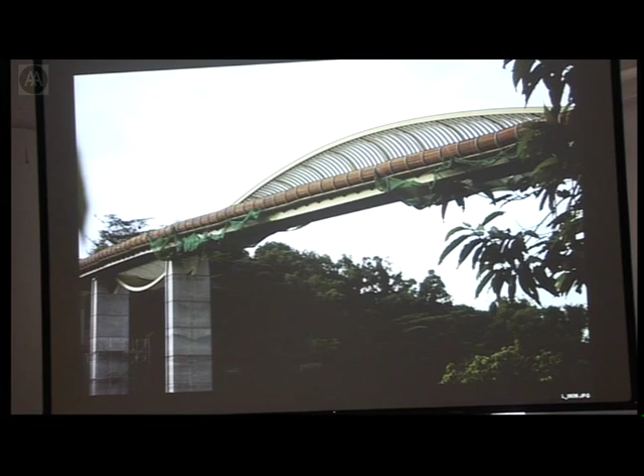This is what Carlos and I were discussing, the fact that this looks faulty, when in reality it's actually simply expressing the alternation of flights and landings. The downside wave, which is, I think, quite beautiful on the landing end, basically where the bridge arrives. And the beautiful mid-height member now seen from the inside, which I think is an unbelievable piece of structure.

The shot that I took last month with a worker adding the finishing touches to the paint, who was very happy to be caught on camera and posed for me briefly.

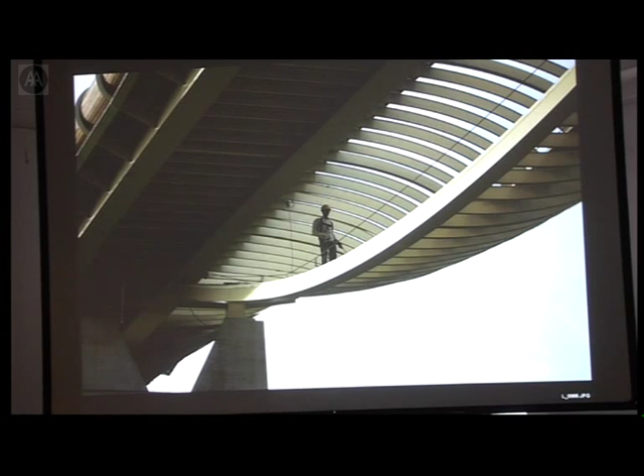Originally, Laurent and I had wanted to bring people down there. It's quite obvious if you just look at this that you can actually step on the flanges and come down, it's smoother than a stair. So we had envisioned that you would actually occupy the upside and the downside pods with a railing over here, but the client thought it was simply too much. And basically this now stays unused, unless you visit the underside of the bridge.

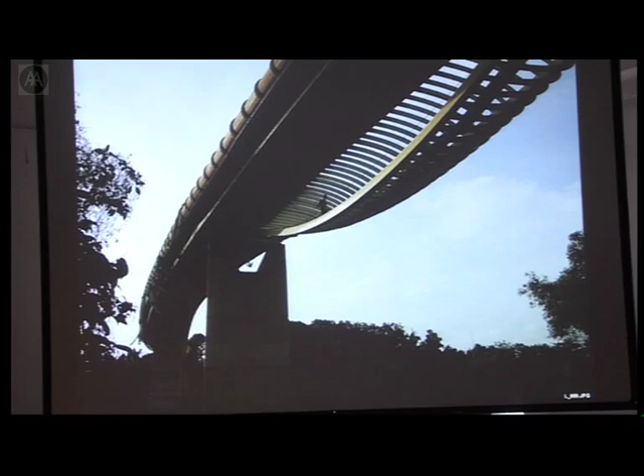I don't have a lot of night views. The concept of the lighting was to express the surface form, so blast light on that, basically on the inner side of the pods. You can see again the mid-height member now in, as we say, contre-jour in French, which is against the light.

And wash the deck on the other side with those lights that are included in the railing. So the combination is this rather happy emphasis on the surface form, which in the end I think is a little perhaps too pronounced, but we didn't really have a say into this scheme.